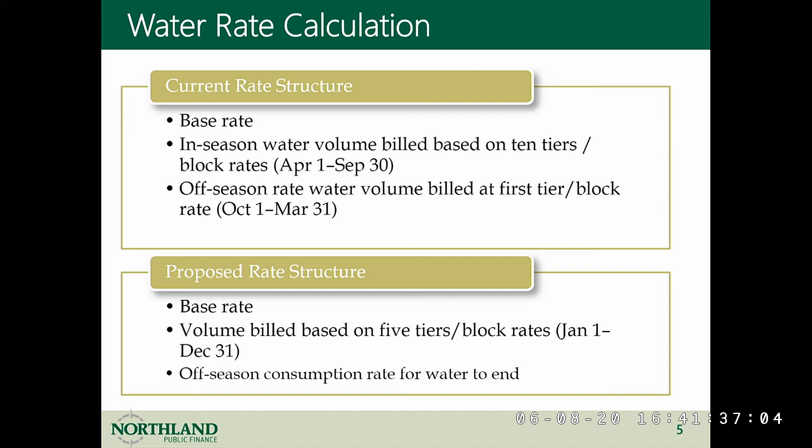Back to slide 5. Under the recommendation, there would continue to be a base rate. Volume would be billed based upon 5 tiers instead of 10, for all billing cycles. So there would be 5 tiers every billing cycle for water. The off-season consumption rate for water would end.

I'll jump ahead, but we can come back if there are questions. For sanitary sewer, there's currently a base rate and a single volume charge, with what I'll call a winter lock, recognizing that water volumes are less in winter since there's no irrigation or other use. Under the proposed structure, there would continue to be a base rate. Volume would be billed based upon 5 tiers, same as water, and I'll show you those in a moment. The volume would be calculated based on average winter volume, the winter lock, which would continue, recognizing that summer water use has a higher impact.

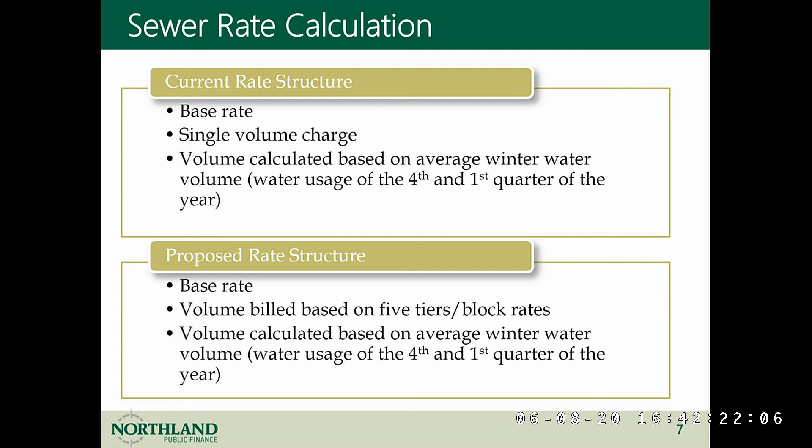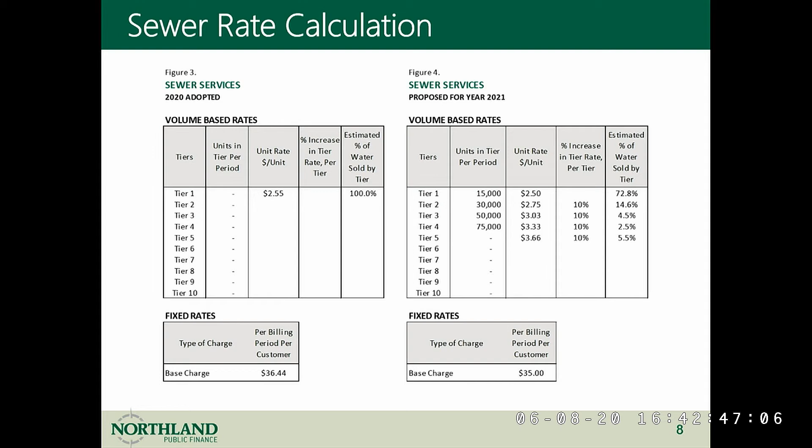Here on the left is what you currently bill: one tier billed at $2.55 per 1,000 gallons, and a base charge of around $36. Under what is proposed, there would be 5 block rates with various charges, and a base rate of $35.

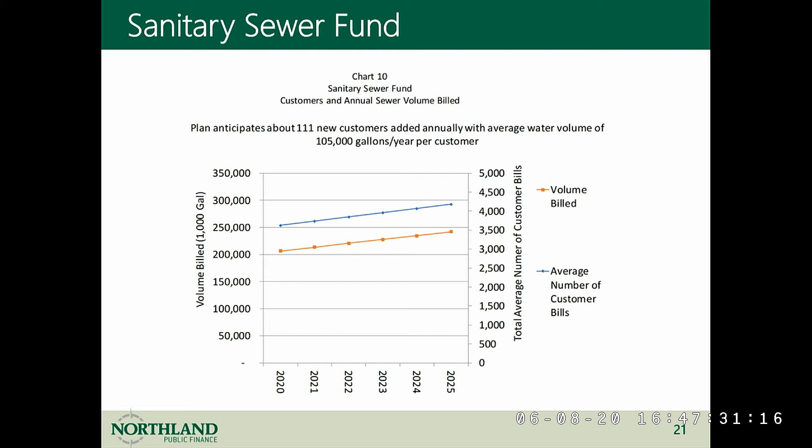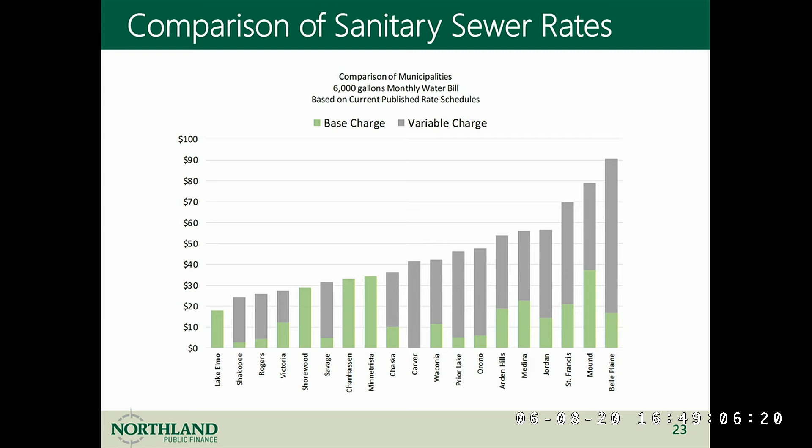For sanitary sewer, again Victoria is on the low end, and this is based upon this current year's published rates by Victoria and for the comparison communities, so it doesn't reflect your changes. This is comparing what is currently billable by these communities. You're about half base and half volume, and Belle Plaine is still on the high end. Sanitary sewer is different than water—that mix between base and volumetric charges is a lot different. I'd also note there are some cities you compare yourself to that are not part of the Met Council payment, so keep that in mind in that comparison.

In the staff report for this agenda item, staff was recommending that the council consider implementing this in 2022 versus 2021. We had started this report before COVID, and it may be more difficult to get that feedback from those customers during this environment, but that'll be up to the council to decide.

All right, thank you, Tammy. We saw this before at the workshop. At this point, let me open it up for the council for questions or comments. Seeing none—question? Yep, go ahead. Couple questions.

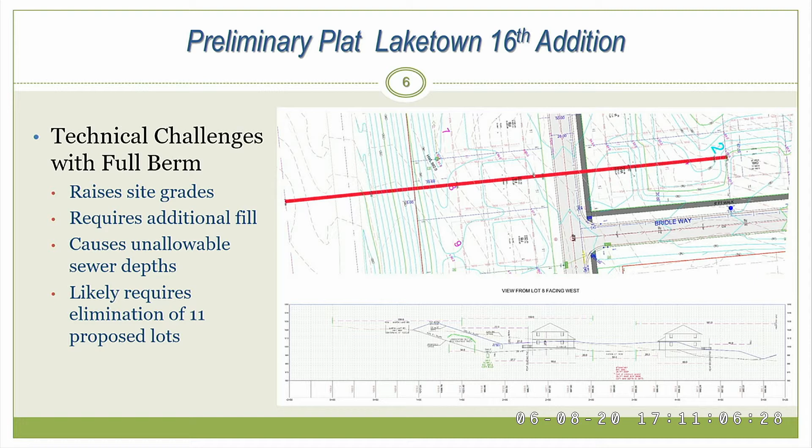City engineering and staff review has also concluded similar findings, and staff agrees that the applicant will likely need to completely reconfigure the proposed plat to get a full berm to fit.

The slide you're seeing now is the close-up view of that cross-section presented by the developer on April 27th. It shows the impact of that 3-to-1 sloped, 8-foot berm on the current plat as it's currently designed.

It's also important to note that on this cross-section provided a month or so ago, the berm is being shown starting right on the edge of the roadway, which would not be permitted. If that were to move even farther inward away from the right-of-way, that makes those conditions worse.

So this is the situation we were looking at with the current proposed plat, trying to get a full berm to the explicit standards of the ordinance.

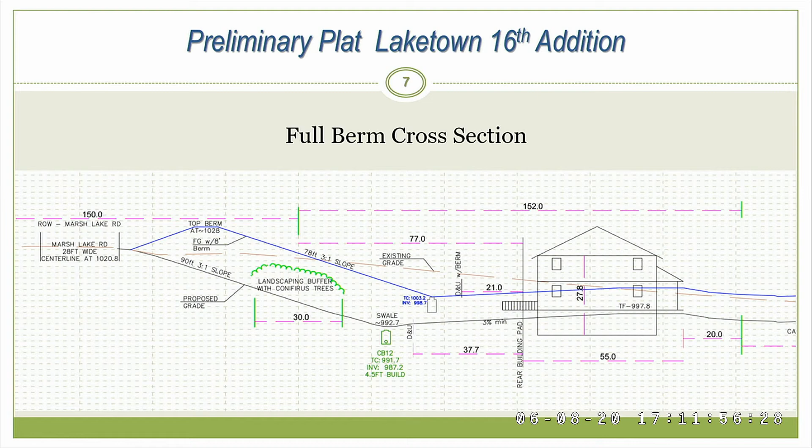As directed by the council, staff and the applicant worked to try to come up with some sort of potential compromise solution that would meet the intent, purpose, and visual screening of the city's berm requirement.

While the city's standard slope on a berm is 3-to-1, we have allowed 2-to-1 slopes on berms in other developments. In those cases, they're typically planted with native grasses and vegetation instead of turf grass to reduce the mowing and maintenance needed on those steeper slopes.

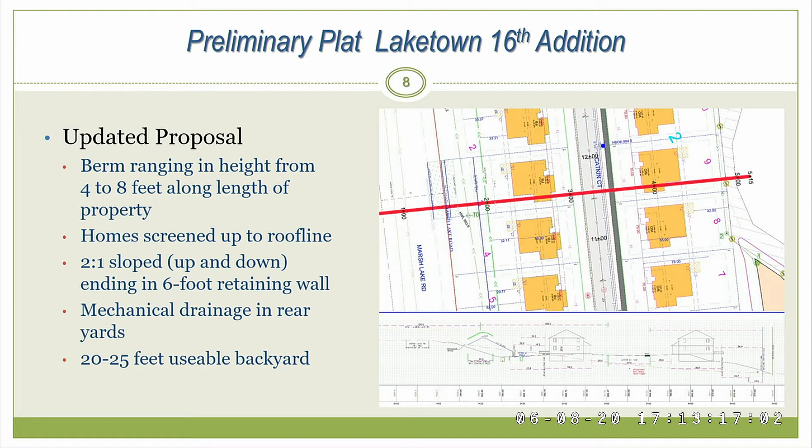Here is a closer view of that cross section, also provided in your report, where you can see that 2-to-1 slope coming up and back down, ending in that 6-foot retaining wall. You can see the storm and swale, the drainage and utility easement, and then what the remainder of that yard would look like from a cross-section view.

This is a cross-section view of Lot 3. As you'll recall, they went from west to east, Lot 1 through 11. So this is farther west, where conditions would allow a little bit larger yard in this configuration. Then as you continue to the east, this is Lot 8 - sorry, did I have that backwards? I think I had that backwards. To the east, the condition changes a little bit; you'll see the berm is shorter here because the house would be lower in the ground.

So you can kind of see between the two what we are talking about with that berm varying in height as it goes along that roadway, but trying to maintain that screening to the road.

It looks like that berm in Lot 3 is outside the right-of-way from Marsh Lake Road, and in Lot 8, the berm is back inside the right-of-way.

Yeah, I was going to address that in my presentation as well, but since we brought it up, we talked to the applicant, and engineering staff agreed that the start of that berm could extend out as far as 15 feet into the right-of-way in this situation, because there's more right-of-way dedicated than what is currently needed with the updated Marsh Lake Road information. It went from needing 150 feet of width to 120 feet of width going forward, and that's due to that no longer being a 4-lane road, correct?

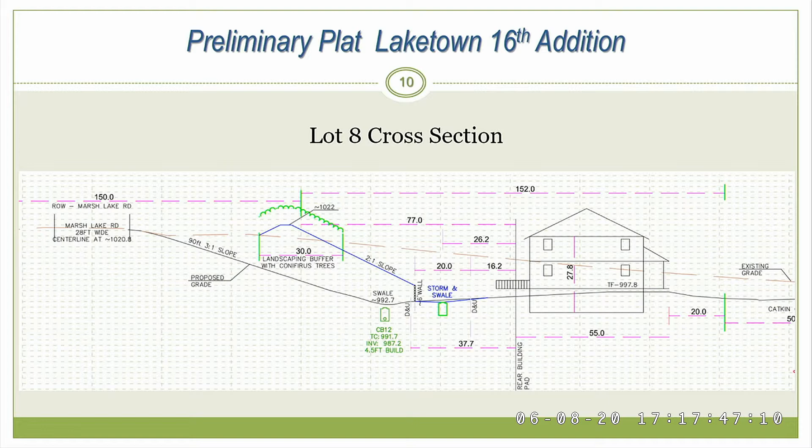All right, you have more? Go ahead. Yeah, just about done here.

So we talked a little bit about those conditions. Staff did report to the Planning Commission that we thought this could be a reasonably, professionally reasonable compromise. However, it did create some conditions that we wanted the Planning Commission and the council to discuss and weigh in on. We've talked a little about those already, but one we haven't touched on is the creation of that rear yard retaining wall. That's something that, from a staff perspective, we try to avoid whenever possible. In fact, that was the initial direction given to the applicant way back when we first started talking — to try to grade out retaining walls, just because they eventually become somebody's responsibility. The city doesn't necessarily want to keep and maintain those when they break or need to be rebuilt. In this situation, they would become the responsibility of either an HOA that's created or those homeowners in the future.

That is something to consider, that we'd be creating that condition of those walls becoming a private responsibility. What kind of builder warranty comes with those retaining walls? I believe there is some documentation that notes it's the buyer's responsibility within the HOA docs or the covenants that are provided. The city would require some sort of agreement indicating to any buyer of those lots that that's their responsibility, or if it's an HOA, the HOA's responsibility. So there's no warranty that comes with these? That would likely be up to the builder or the developer — Paul could probably speak to that more once he jumps in. All right, thank you.

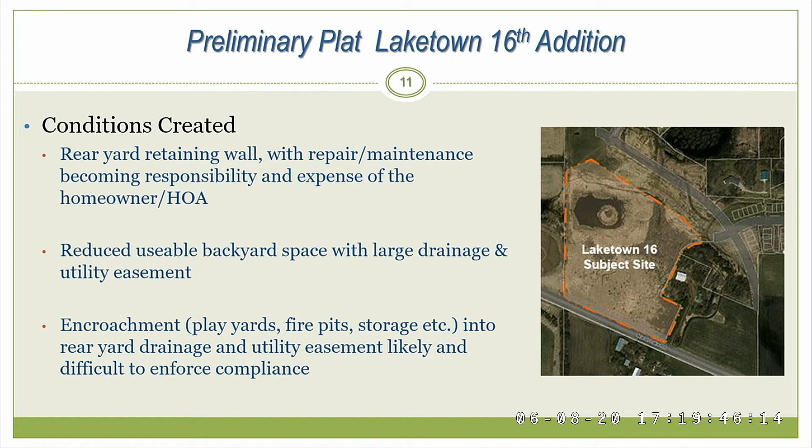We talked about the rear yard space. It does reduce some of the rear yard space from the very initial proposal, about 10 to 15 feet, and you've got that large drainage and utility easement. We talked about some of the encroachment items — play yards, fire pits — that would likely happen and be hard to enforce.

As we reviewed this with the Planning Commission, staff also highlighted that the foot of the berm would begin within that public right-of-way for a portion of it at least.

Staff also noted that further information from a full grading plan would be needed to determine the suitability of lots 9 through 11. The farthest east cross-section shows lot 8, so staff is fairly confident those conditions would be in place for lots 1 through 8. Had the Planning Commission recommended approval, one condition would have been to get that grading plan to review lots 9, 10, and 11, but since they recommended denial, we did not get that additional information.

We also noted we'd need to do some additional work with the applicant on storm drainage, stormwater management, and water drainage with that wall. Ultimately, the Planning Commission looked at all these conditions and the berm requirements, and determined that the combination of factors, highlighted by the lack of a full berm, created a situation where they could not recommend approval.

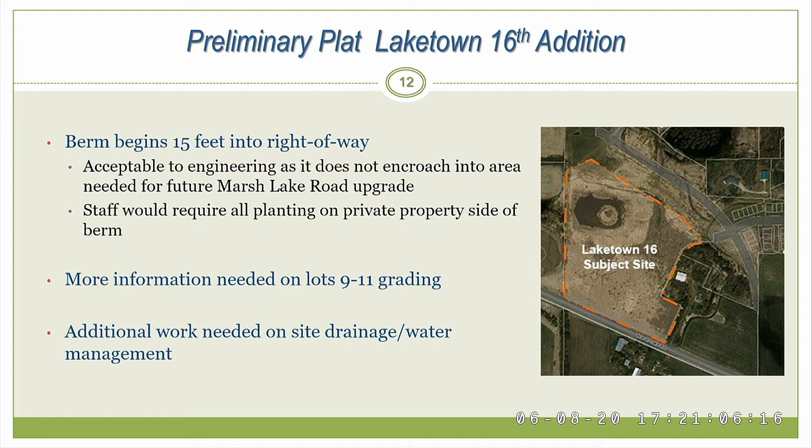My last slide here before discussion: staff reviewed three different scenarios over the past several months with this preliminary plat. Scenario 1 was the condition put in place at the first Planning Commission meeting for approval, that full berm and buffer requirements be met. As discussed with the applicant, it is just not technically possible to get a full berm and buffer given how it is platted. That's the scenario the Planning Commission used for their recommendation of denial.

The second scenario is the very first original applicant proposal, which did not include a berm—more of a hill coming down from the roadway. This created better yard situations, more usable flat yard area, but sacrificed the level of buffer that a berm would provide, which was the Planning Commission's initial impetus for putting that condition on.

The third is the current applicant proposal, which creates a portion of a berm with some retaining wall that staff believes would be professionally reasonable, but does create some conditions for you all to discuss and determine what you think is best.

And with that, I will conclude my presentation, and just as a reminder, we do have Paul Tabone on the line. All right, thank you, Marty.

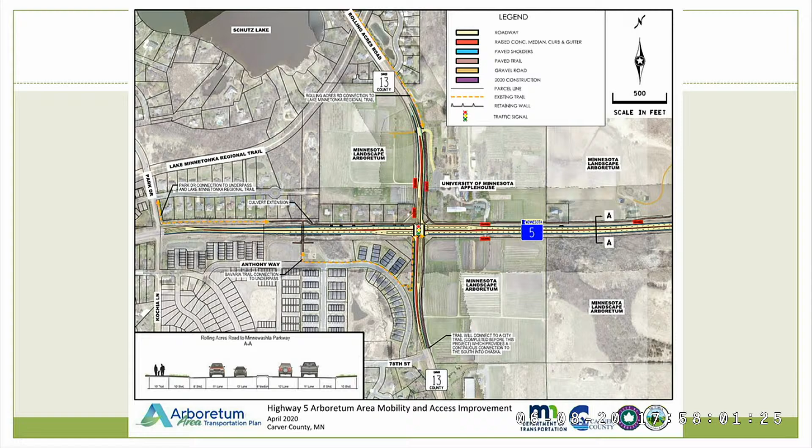So as part of the application, worked on simultaneously, the Technical Advisory Committee has been working on possible locations for pedestrian crossings of Highway 5. There's a number under consideration along the whole length of the corridor, and the Park and Rec Committee reviewed that in much greater detail at their May 18th meeting. But we have an opportunity here with this application because it's being applied for federal funding, there'd be an opportunity for federal funding to be applied to this pedestrian underpass based on the way points are allocated through that process. So the Technical Advisory Committee thought it would be advantageous to include this one, since it would have the potential to receive federal funds.

The overall project has an estimated total cost of about $13.4 million, which includes $2 million for the underpass. If the project is successful in becoming funded, the funding would be available for fiscal year 2024 and 2025. The city would potentially have a cost share associated with that underpass. Detailed estimates aren't available yet because we haven't done any design work. Part of what the county will have to work through is with the gas tax money, the intent is they'll get outside federal funding first, see what state funding could be brought to the project, and then look at how gas tax funding could be applied. So it's a little premature to know the city's specific risk, but the team did identify that it could be up to $500,000.

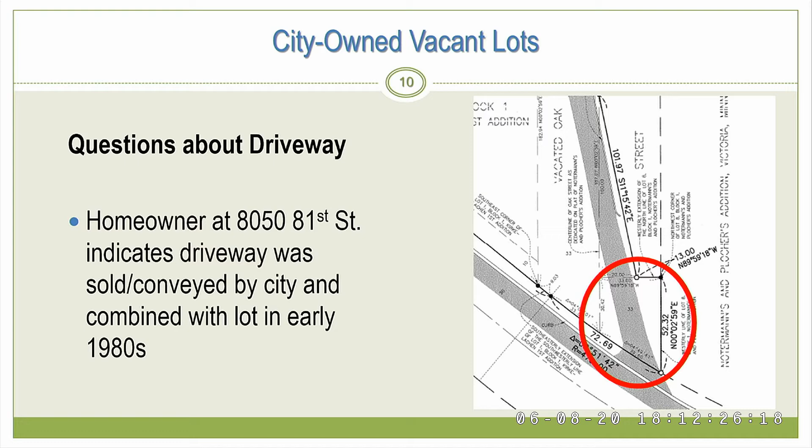Since then I've had conversations with the homeowner on the triangle property. They provided a survey with redrawn lot lines indicating that small portion, where that driveway goes, had been sold or conveyed to them. As I mentioned in the background report, the title work we pulled did not indicate that sale or conveyance. It had happened, as we were told by the property owner, in the early 80s. So we've got to do a little more homework to confirm that. I have no reason not to believe him, but we need to confirm it. At least as of today, staff is working under the assumption that there is no easement or encroachment issue and that the driveway is actually within the other property owner's lawful property.

So, public feedback on this one: we had 19 letters sent out. We received 3 responses plus the additional comment tonight, 2 with concerns and 1 with no concerns.

On this one, again, there was some concern that the setback requirements would force the house to the north, which I'll show you is accurate in the next slide. That would require removal of many of the mature trees in that area, disturbing and destroying the natural gateway from Old Victoria as you come through, and disruption of lake views for existing homeowners. Suggestions were to keep it as city-owned green space, and there was also a comment about whether adjacent property owners would have the opportunity to purchase if it went up for sale.

So this one would likely require a lot of tree removal, so that statement from the homeowner is accurate. Just based on the setbacks, because this is a corner lot, you need a front yard setback of 30 feet on both street frontages. That pushes the property 30 feet from 81st, which really gets right into the heart of those trees in that area.

With that, I'll turn it over for discussion. I know in the ordinance it talks about significant trees versus insignificant trees. What are these, hardwoods?

Yeah, so the property owner to the northwest that I've spoken to said there's a lot of mature maples. I believe he said some mature oaks. I have not actually walked out on that property yet, but it sounds like there are some mature, well-grown hardwood trees out there. Okay, I'll start on this one.

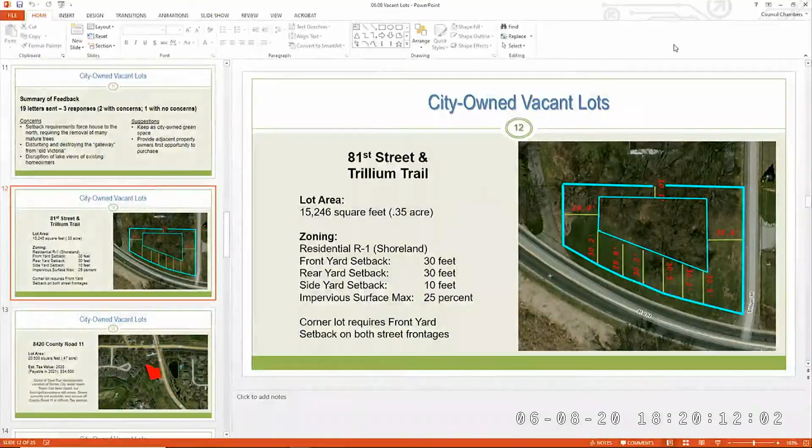How do they access that park now? You can drive right back in there. It's behind the Bavaria Auto Works, on Trillium Trail. Can we go to the bigger map? I think I know what you're saying. You'd have to drive down this road to get to that park, but I agree with you, the park, I walk by that park too, and it's not very nice. And it's not being used, every time I've gone by I've never seen anybody there.

So if you put your cursor over for just a moment. Here's the property we are talking about, right here. And then go up to the park, there. No, that's not it. Go down. Yeah, it's right there, that's it. That whole area.

So if you take this road, it comes behind Bavaria Auto Works. It's sloped pretty heavily, where you see the green with the line of trees. You could get parking in the green, you couldn't do anything with the trees, but if we converted that to parking, it's easy to put in a walking path. It's a little bit steep, but not bad. We could build a walking path that comes down, goes under Highway 5, and you're right downtown. I don't know how many cars we could fit in there, but that's an easy extension for downtown parking, especially when we're doing events.

Would you move the parcel, blowing up, to show the park we're talking about? Yeah, I can. So this is the park right here. That's Salter, and then Kirklocken is a little bit to the west. Yep, there it is, right there. This is the one I was thinking of. Kirklock, right, that one we leave, and it has parking.

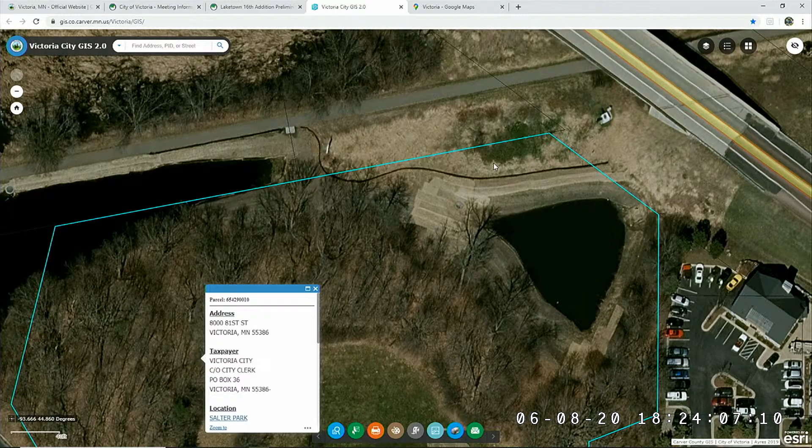So the other thing too is if we don't take action on this particular parcel tonight, it'll give council members a chance to go out there and look at that park. I've never seen anybody there. I've never seen it used.

And so if we keep the mature trees, we keep that other part where you can look out over Church Lake, and basically just move this park to that parcel which we already own. Then we can actually entertain options of extending downtown parking. Think of our car shows and other events. If we can get another 40 or 50 parking spaces, walking distance, I think we should consider that.

For special events, I wouldn't disagree, I wholeheartedly agree, we can look at that. But back to the other parcel, I think it's too small to do anything for a public type use. I think it lends itself perfectly to selling it as a beautiful lot overlooking Church Lake, and I would wholeheartedly agree that we should sell that.

And we can sell that and still pursue this plan for parking. Right, exactly. We could do both.

So specific to what the staff wants from us tonight, let's talk about the parcel for sale. I heard, Deb, you say let's go ahead and put it in the market and offer it to the neighbors first. Yes, sir. Judy, is that where you're at with the parcel? Yes. Okay, Councilmember Gregory, that's where you're at?

Councilmember Vogt? I'd be in favor of keeping the parcel. Okay, I think I'm in favor of putting it up for the residents. We can actually maybe, if it does sell, use that money to actually build parking, at least offset cost of parking. So it sounds like we've got a 4-to-1 on this particular piece.

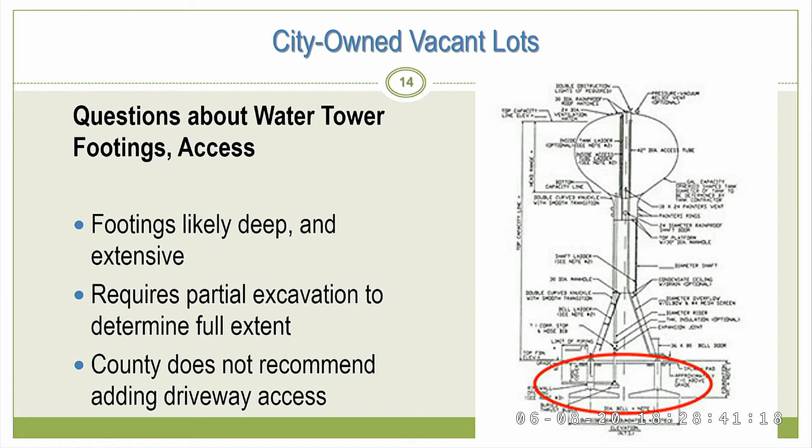In addition, we did receive some feedback from the county on this one, as they're a neighboring property on some of these properties, and they indicated that they would not recommend adding a driveway on County Road 11 due to traffic levels on Victoria Drive. So that's some feedback from the county as well.

So our other feedback with this property, we sent out 27 letters. We received 5 responses to the survey, 5 of them with concerns. Those concerns were an increase in traffic and dangerous access to the property, loss of natural land and trees, loss of privacy for existing neighbors, concerns with setbacks and where that would put the house on that lot, proximity to the Deer Run tee box, loss of walking connectivity, and cost to city taxpayers to get that site build ready.

Some of the suggestions were to create a nature park, to plant more trees and foliage, and just leave it vacant and continue maintenance.

Is Greencrest the townhomes that are kind of northwest of this? Yes. Okay.

Isn't that where we were talking about putting the sidewalk up to the intersection along 43? If they went here, they would come through here, and then there'd have to be a sidewalk or trail north toward the corner. But it might be safer to do that than to run along. We're not gonna put a crosswalk here — we're looking at it for a cost comparison, because the other route was so expensive, so we're looking to see if this is a more cost-effective connection. It looks like it's about the same cost as the other one, but we were going to bring that to the neighbors in July. Is there a way to cross the street? There's a trail right across the street.

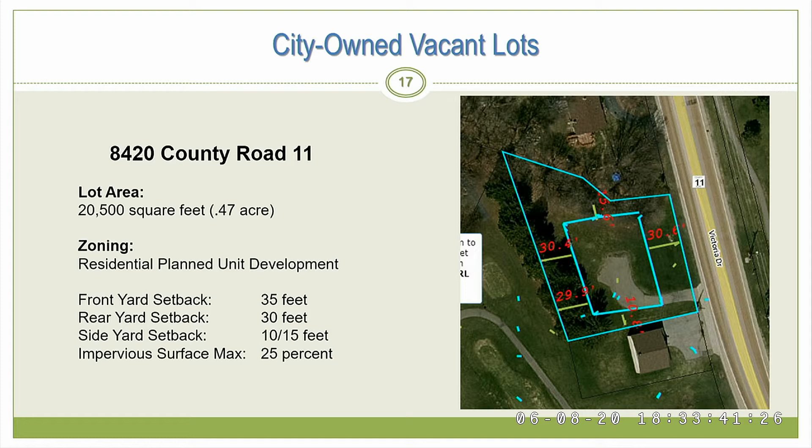It would be great if we could bring that sidewalk up from Greencrest through here, but would we have right-of-way acquisition problems going north with those other two homes? It looks like there's adequate right-of-way going north with the other two homes, but we'd have to have an easement across the golf course. We did a high-level concept because the other route is $100,000, which is pretty expensive for that type of connection. On a cost-per-foot basis it's costly because we'd have to build a retaining wall to fit that in. The county suggested we look at this as a more cost-effective alternative. It looks like there's right-of-way on 11 to get up to the intersection, but cost-wise they seem fairly similar from a high-level perspective.

Our intention is to have a neighborhood meeting in July with the Greencrest folks and these property owners who would be impacted by a sidewalk connection, to get feedback and then bring that in front of the council.

Okay, no, I agree, part of the budget. This isn't a great lot to build a home on—it's too busy of a road, and there are other issues, so I agree, let's hang on to it.

Councilmember Vogt? Either a trail or a building, or both. CenturyLink is in and out of there every day—you can see trucks there all the time, so there's activity there right now. Yeah, and I would agree. So we keep it, and we can figure out whether it's a trail, a pole building, or we just keep it in the city's inventory.

Council, any further comments or questions? Okay, so this one is not going to be sold.

Next parcel. All right, so the last one to talk about tonight is 6735 Smithtown Road. This is the property adjacent to South Lakes Virginia Shores Park, and as you'll recall, it would likely need to be combined with some adjoining parkland to make a buildable lot. The biggest topic of discussion on May 11th was centered around whether or not there was programmable park use that could happen in this area.